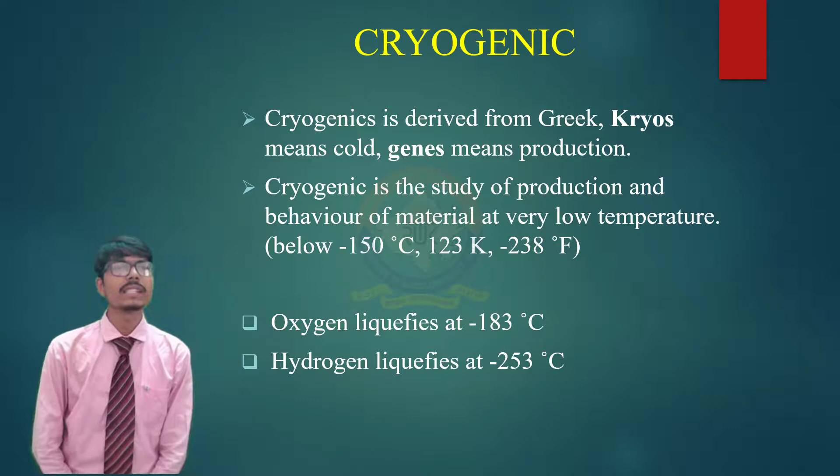Firstly, introduction to cryogenics. Cryogenic is derived from Greek. Kryos means cold, genes means production. Cryogenics is the study of the production and behavior of materials at very low temperature, below -150 degrees Celsius. Oxygen liquefies at -183 degrees Celsius. Hydrogen liquefies at -253 degrees Celsius.

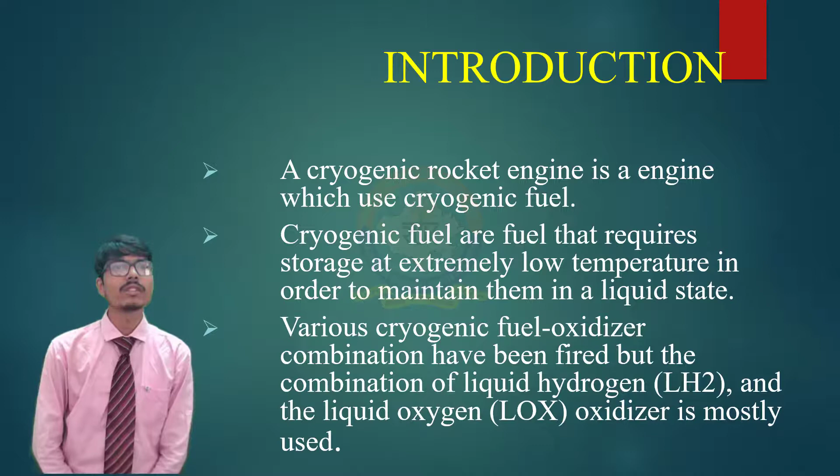Introduction of cryogenic rocket engine. A cryogenic rocket engine is an engine which uses cryogenic fuel. Cryogenic fuels are fuels that require storage at extremely low temperature in order to maintain them in a liquid state. Various cryogenic fuel-oxidizer combinations have been fired, but the combination of liquid hydrogen fuel and liquid oxygen oxidizer is mostly used.

Now coming to the history of cryogenics. The RL-10 was the first liquid hydrogen cryogenic rocket engine to be built in the United States, and development of the engine by Marshall Space Flight Center and Pratt and Whitney began in the 1950s, with the first flight occurring in 1961. These engines were one of the main factors of NASA's success in reaching the moon by the Saturn V rocket.

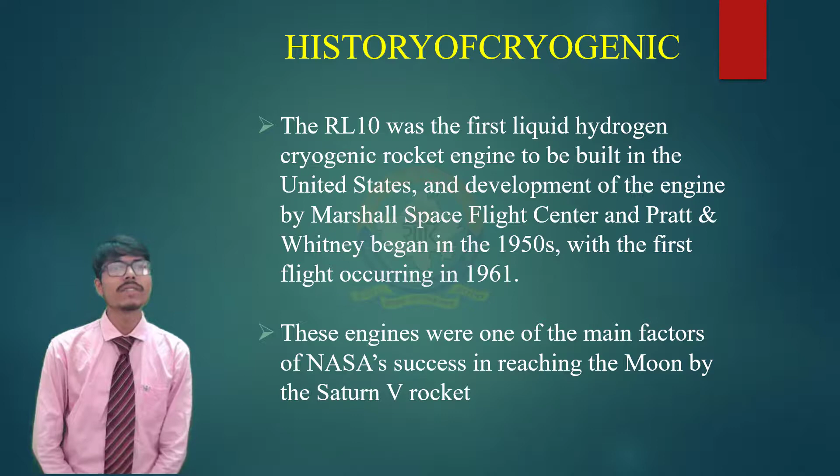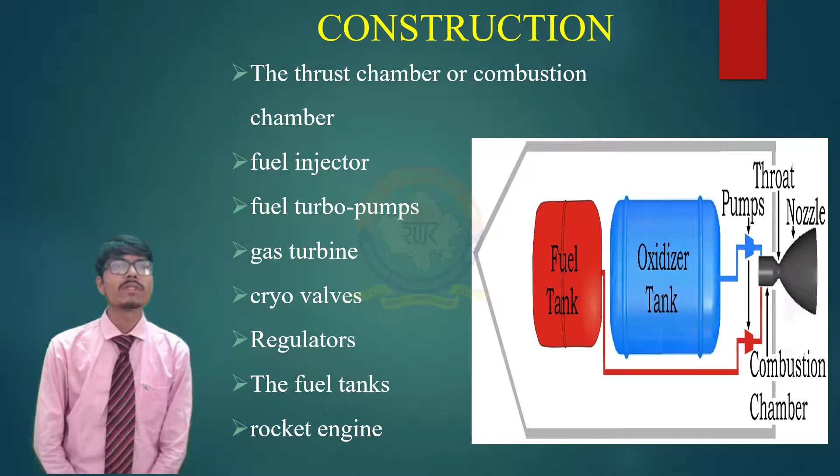Now coming to the construction. The thrust chamber or combustion chamber, fuel injector, fuel turbo pumps, gas turbine, cryovalves, regulators, the fuel tanks, rocket engine.

Now coming to the working principle. The basic working principles driving a rocket engine are Newton's third law of motion and the law of conservation of momentum. In principle, a cryogenic rocket engine derives thrust like all other rocket engines by accelerating an impulse carrier to high speed. The chemical energy stored in the fuel is converted into kinetic energy by burning fuel in the thrust chamber and subsequent expansion in the nozzle to produce thrust.

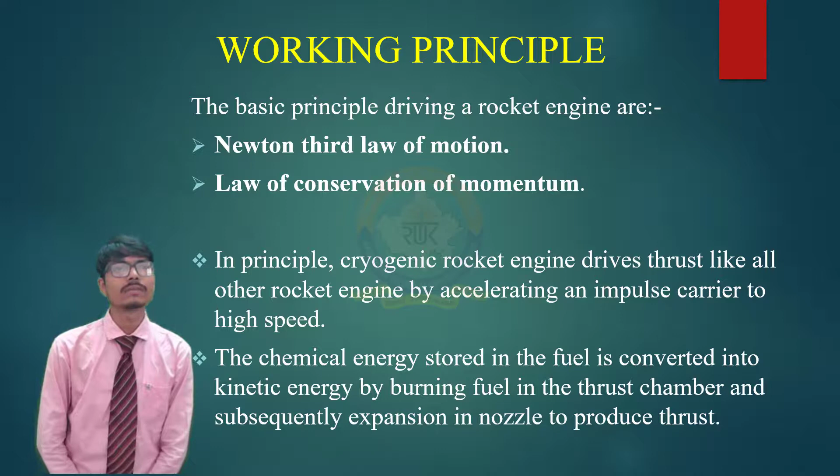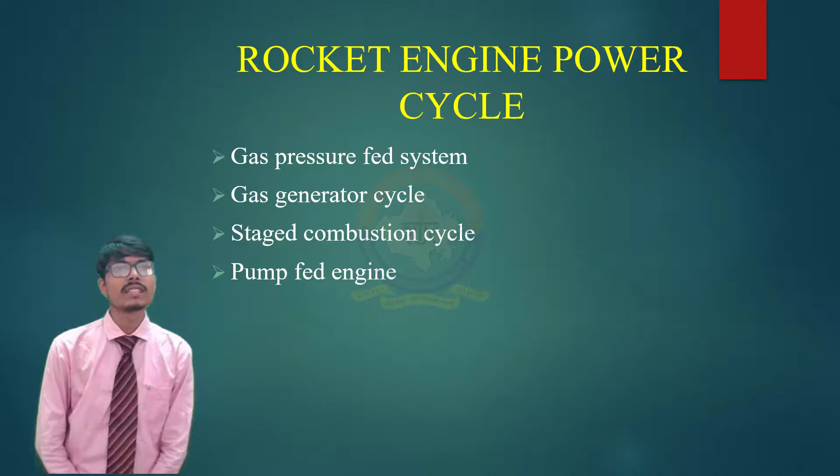Now coming to the rocket engine power cycles: gas pressure fed system, gas generator cycle, staged combustion cycle, pump fed engine. Gas pressure fed system. The pressure-fed engine is a class of rocket engine. Helium is used to pressurize the propellant tank to force the fuel and oxidizer to the combustion chamber. Tank pressure should exceed the combustion chamber pressure.

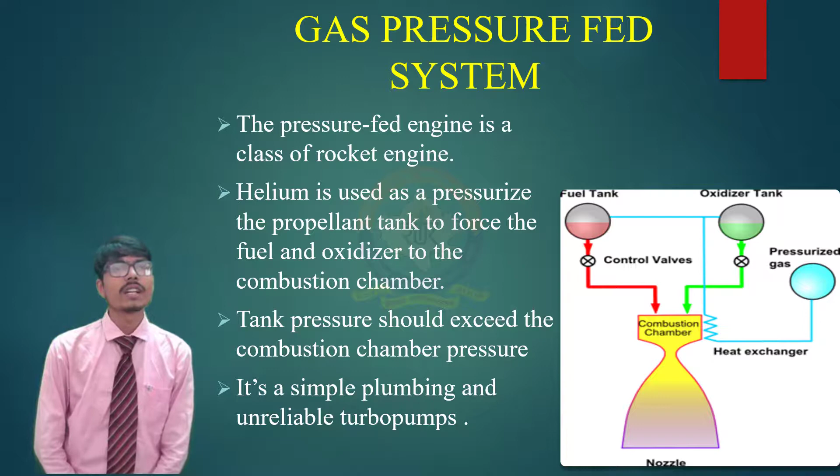It's simple, avoiding plumbing and unreliable turbo pumps. If the fuel is hypergolic, then they burn on contact. If not, an igniter burner is required to ignite. Uses: quad rocket, Aquarius launch vehicles.

Gas generator cycle. The gas generator is a power cycle of a bipropellant rocket engine. Some of the propellant is burned in a gas generator and the resulting hot gas is used to power the engine's pumps. Some of the fuel in a gas generator cycle may be used to cool the nozzle and combustion chamber. Uses: F1 rocket engine, Vulcain, CE20, etc.

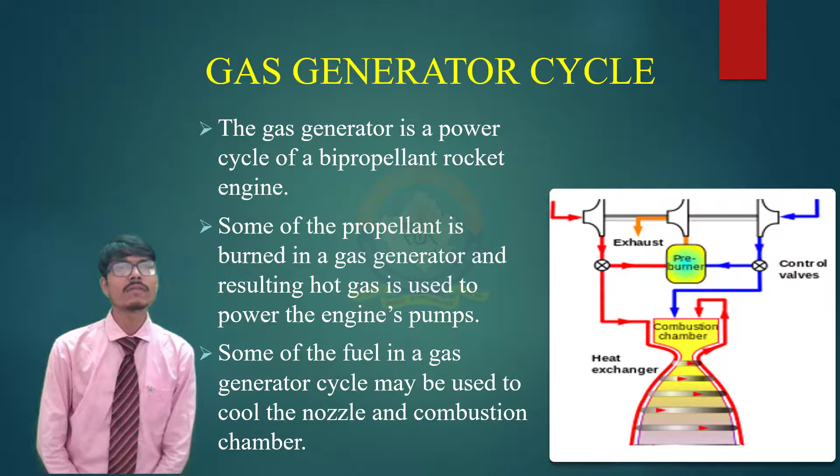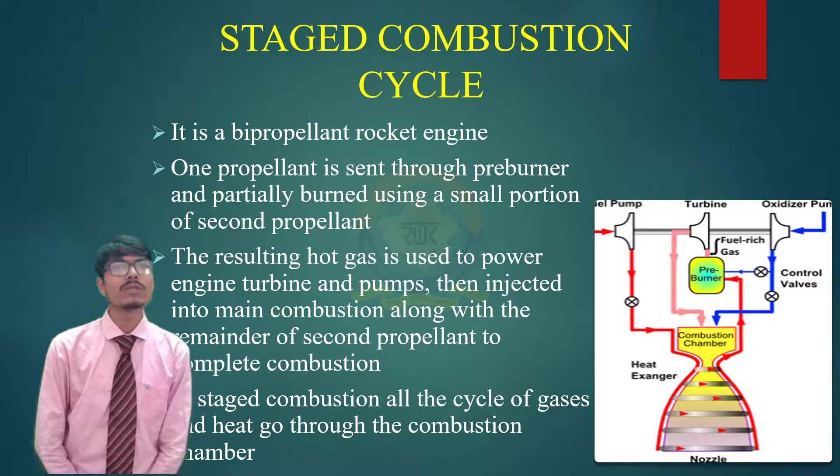Now coming to the staged combustion cycle. It is a bipropellant rocket engine. One propellant is sent through a pre-burner and partially burned using a small portion of the second propellant. The resulting hot gas is used to power the engine turbine and pumps, then injected into the main combustion chamber along with the remainder of the second propellant to complete combustion. In staged combustion, all the cycle gases and heat go through the combustion chamber.

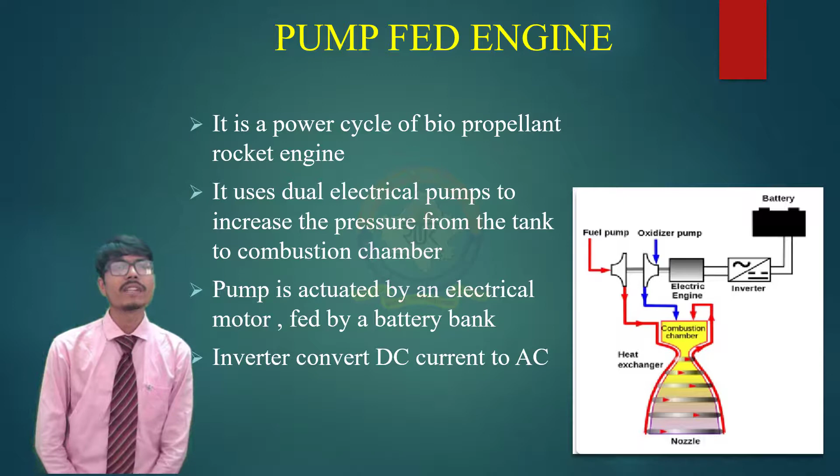Now coming to the pump fed engine. It is a power cycle of a bipropellant rocket engine. It uses dual electrical pumps to increase the pressure from the tank to the combustion chamber. The pump is actuated by an electrical motor fed by a battery bank. An inverter converts DC current to AC current.

Advantages: high energy per unit mass. Propellants like oxygen and hydrogen in liquid form give a very high amount of energy per unit mass, due to which the amount of fuel to be carried aboard the rocket decreases. Clean fuels. Hydrogen and oxygen are extremely clean fuels.

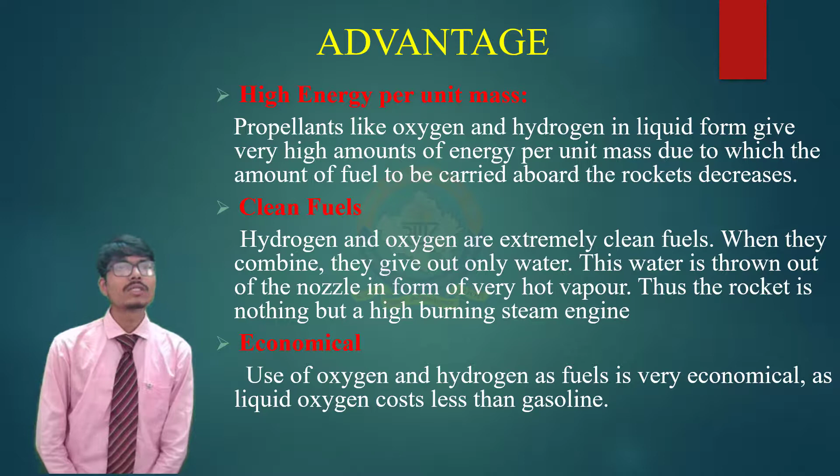When they combine, they give out only water. This water is thrown out of the nozzle in the form of very hot vapor. Thus, the rocket is nothing but a high-burning steam engine. Economical. Use of oxygen and hydrogen as fuel is very economical, as liquid oxygen costs less than gasoline.

Disadvantages. Boil-off rate: cryogenic fluids are difficult to store for a longer period. Highly reactive gases. Zero gravity condition. Leakage. Low density requires a larger tank. Hydrogen embrittlement.

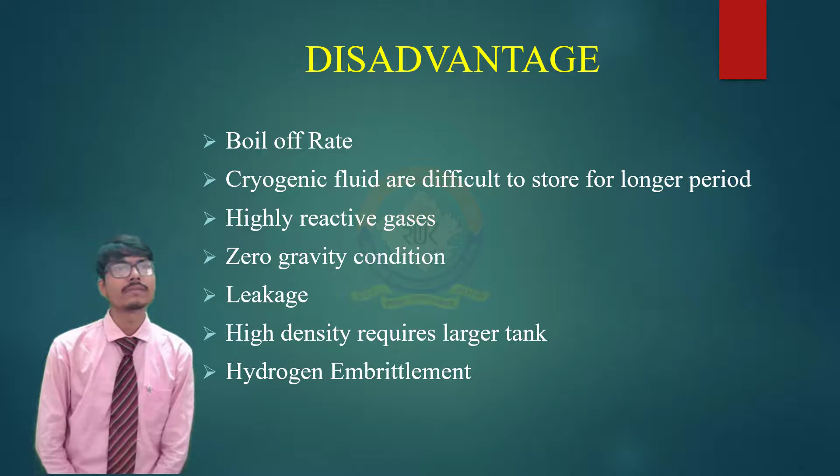The next generation of rocket engines. All rocket engines burn their fuel to generate thrust. If any other engine can generate enough thrust, that also can be used as a rocket engine. There are a lot of plans for new engines that NASA scientists are still working on.

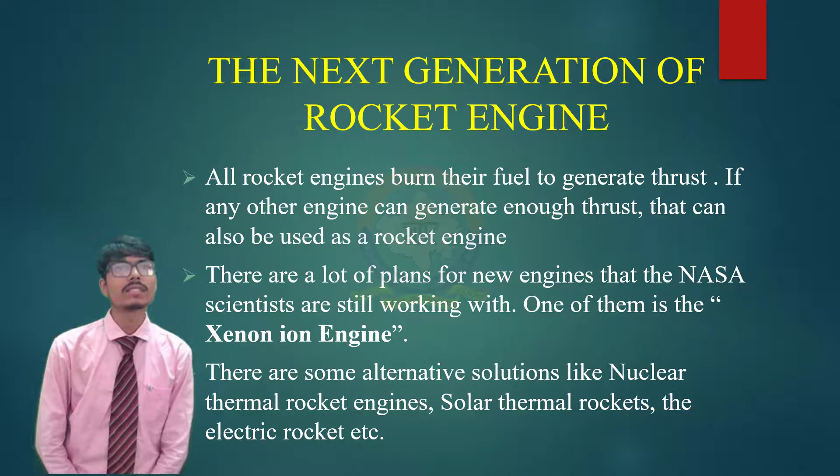One of them is the xenon ion engine. This engine accelerates ions of atomic particles to extremely high speed to create thrust more efficiently. NASA's Deep Space One spacecraft will be the first to use ion engines for propulsion. There are some alternative solutions like nuclear thermal rocket engines, solar thermal rockets, the electric rocket, etc.

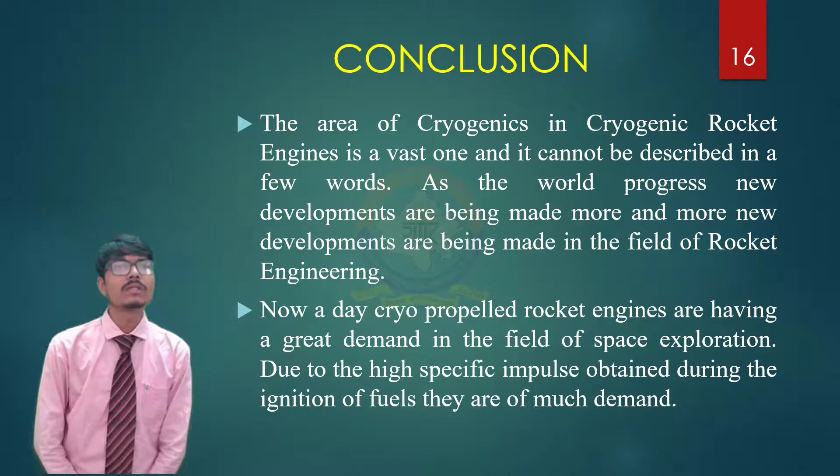Conclusion. The area of cryogenics in cryogenic rocket engines is a vast one, and it cannot be described in a few words. As the world progresses, more and more new developments are being made in the field of rocket engineering. Nowadays, cryopropellant rocket engines are in great demand in the field of space exploration. Due to the high specific impulse obtained during the ignition of fuels, they are in much demand.